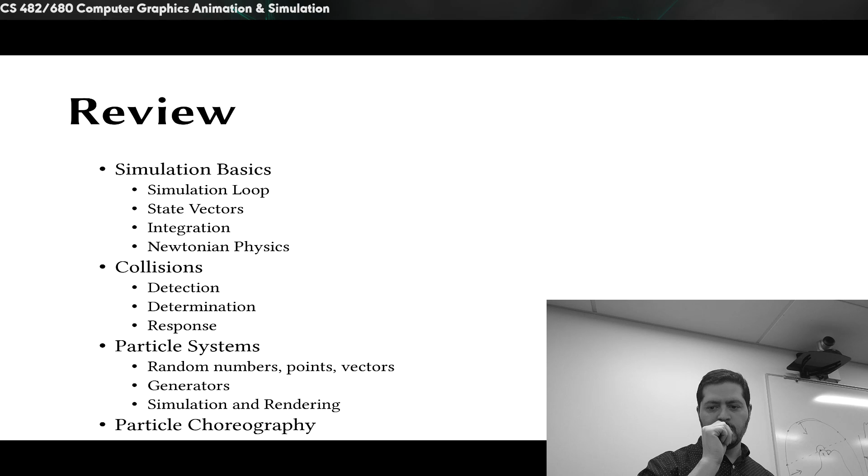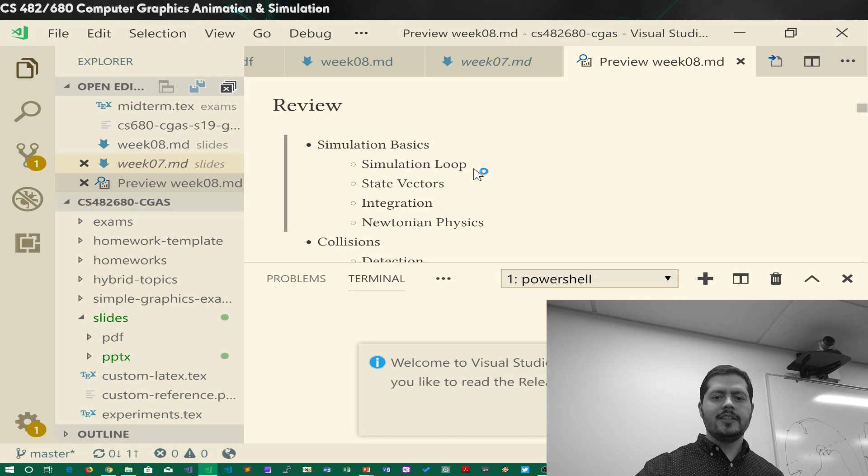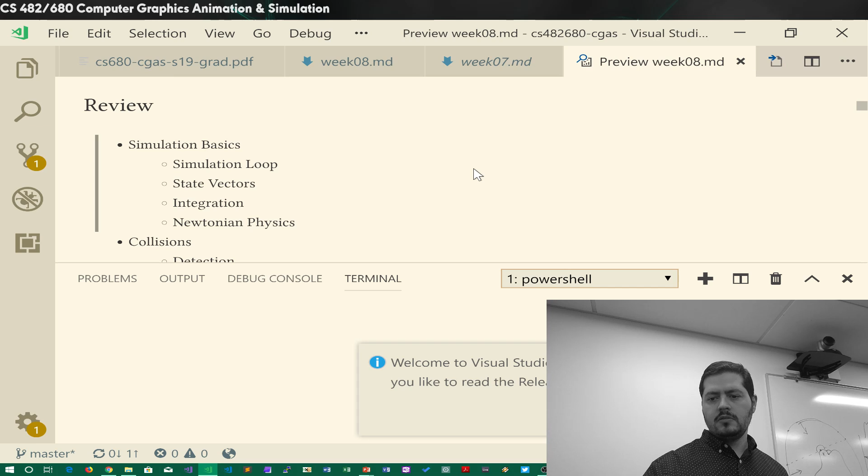Okay, so as a matter of review, I'm going to switch over to this one over here. So more or less, we started talking about some of the basics when it comes to simulation, like the simulation loop. We talked about collisions, where there's 3 steps: the detection part, then determination, where it happened, and response, what do you do once you know it happened.

Then we have particle systems. A lot of that's how do you go about generating random numbers? How do you generate where the particles are coming from, the particles themselves, the vectors, what direction are they heading off? The generators: you might have different kinds of generators, and they might have different shapes. A fireworks generator might look different than a water spout, or a stream of water.

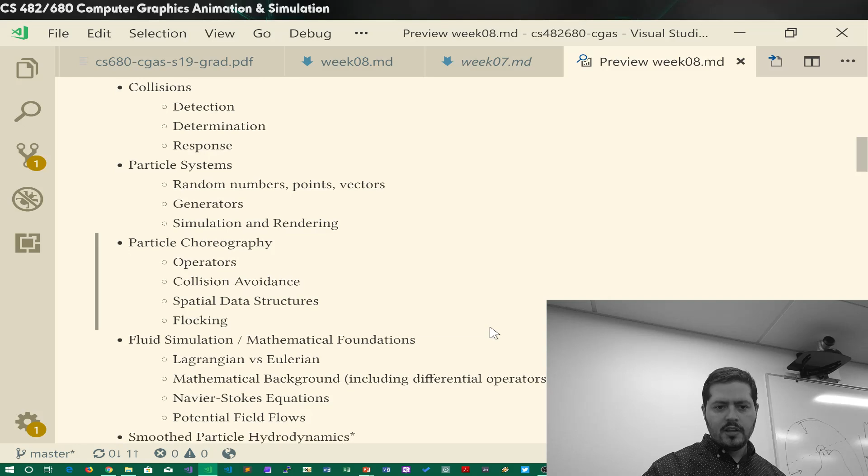And then how do you take these particle systems and go about rendering them? That goes along with Reeves' original paper, a technique for modeling a class of fuzzy objects. How do you go about representing that? So that's some of the basics of particle systems, and then we started going into choreography, how do you do stuff with them. Before, there's not a whole lot of physically based stuff going on here.

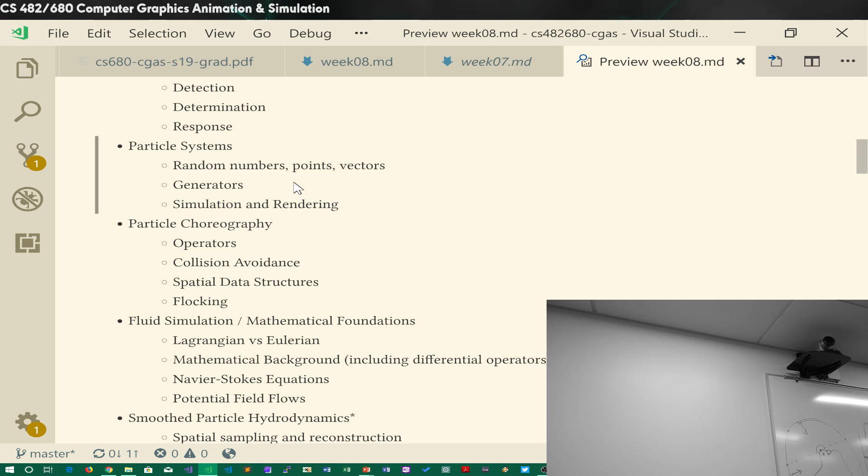There is some, but over here we're getting into operators, and you have acceleration operators like gravity. You could have some non-physically based operators as well, like velocity operators. Maybe you're trying to get particles up to a minimum velocity, or make sure they don't go too fast, so you might have a maximum velocity. Those are not technically physically based. Yes? Would a bounding box effectively be a position operator?

Yes. Okay. So a lot of times we might call that a boundary condition rather than an operator. A position operator would depend on whether you're just keeping the positions and they run up against the wall, or you're actually doing something with the velocity, like bouncing them off. And that might be part of the collision response, if you're handling that.

I don't know that the book is using the term position operator, but a lot of times it's more beneficial for you to think of it as a boundary condition. Especially as we're talking about fluids, because that term will help you understand the partial differential equations, where the boundary conditions help keep everything in control.

All right. So then we started talking a little bit about spatial data structures. Spatial data structures are useful when you have lots of particles and you need to get this under control, like with collision. If you're trying to have every particle interact with every other particle, it can quickly become something you cannot calculate, especially in an interactive application. So you may want to, like the galaxy simulation.

We're starting to move into fluids, and yes. I was just going to check, especially the spatial data structures, is there a specific lecture section, or is that mainly in the Hybrid Topics video? I don't know that we talked as deeply about spatial data structures in class. Maybe one of these papers is loosely talking about it. I think we talked more generally about it in class without too much detail.

How specifically will we need to understand it, like specific models, for the exam? I think it's how they're used in general. If you're going to talk about a spatial data structure, you should cite something, because I might ask a general question: how would you go about simulating a galaxy? You would need to talk about that. Maybe there's a specific technique, or I don't fully remember if one of these papers covers it specifically.

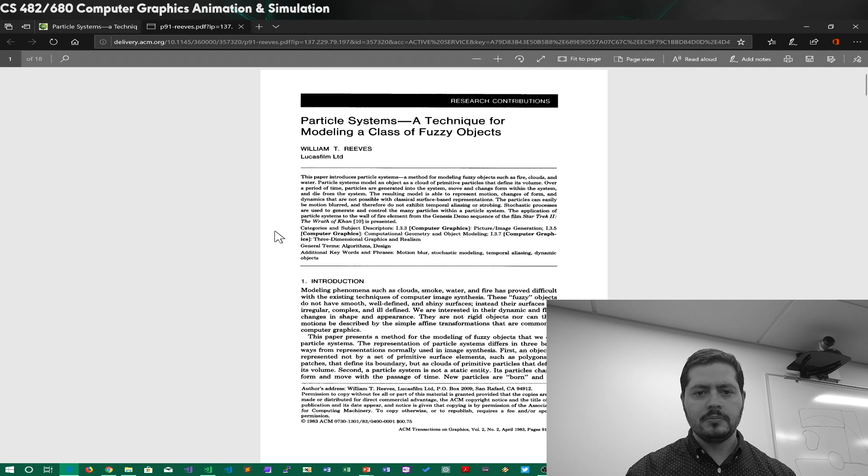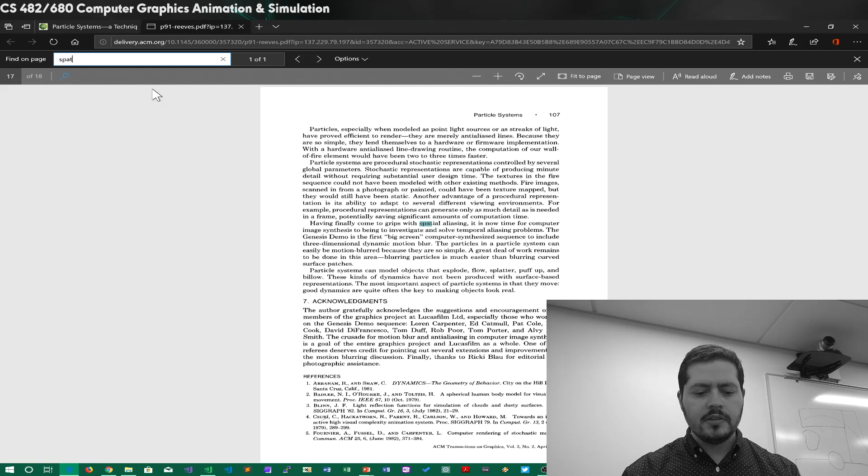Let's look at the 1983 one, because I feel like it would be more needed in 1983, given the computers out there. For all these papers, most of the time you can search for them on Google Scholar. If you have difficulty getting to one, email me and I'll post it on the Slack board. Okay. Spatial aliasing. So not really in that one. Karl Sims might have talked about it.

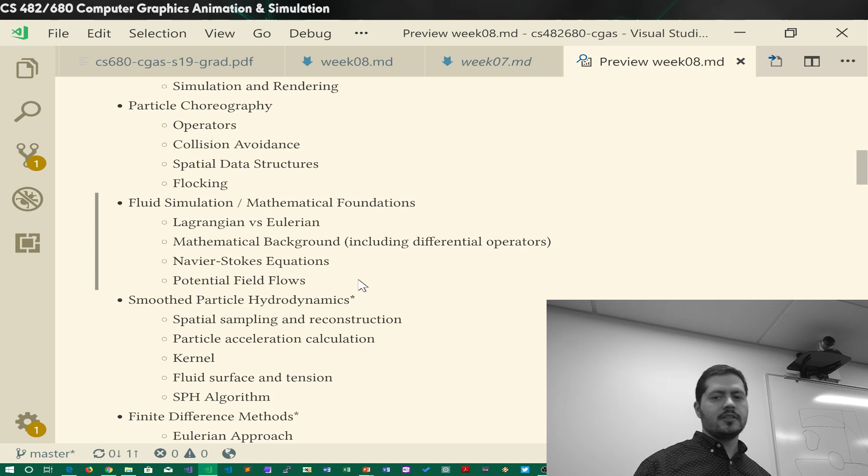And then we were talking about potential field flows. I think potential field flows is kind of cool because it's more or less about how are we trying to change it so that it's something we can handle.

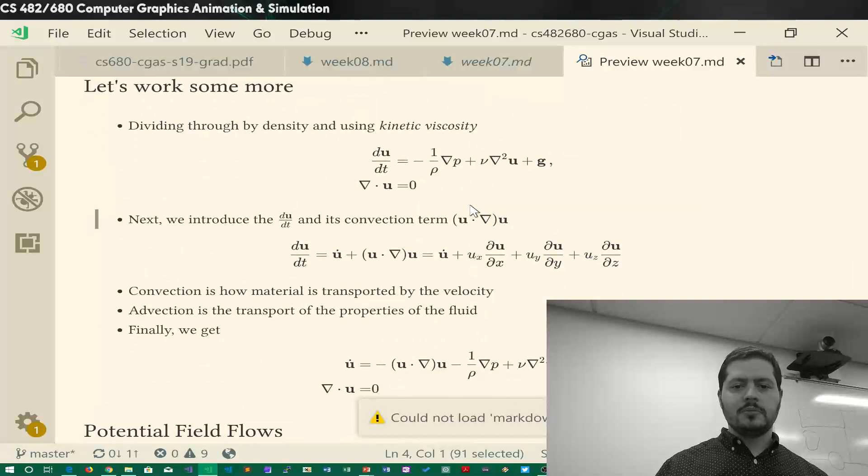So let me open up a preview of this one. Week 7 has a lot of good notes in it in terms of what I copied from the book. But here's what we can do with it - first let's put our Navier-Stokes equation on the board.

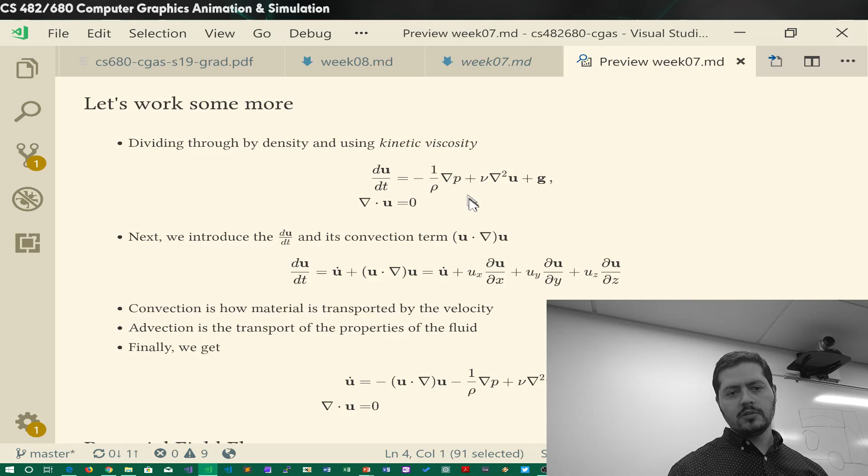Although I think it's kind of funny - does anybody know what Navier and Stokes did essentially? No? They took Euler's equation - if I go here, Navier-Stokes - they took Euler's equation and basically generalized it.

So you have Claude Louis Navier and George Gabriel Stokes, and the idea is they wanted to understand how viscosity affects fluids. If you don't think it's a hard problem, the Clay Mathematics Institute called this one of the 7 most important open problems of mathematics and has offered a $1 million prize for a solution or a counterexample.

If you guys saw the little meme in there: one does not simply solve the Navier-Stokes equation. It's like, oh yeah, that doesn't look so bad. It's like the rendering equation, but I tell you what, the rendering equation is a far easier thing to solve than the Navier-Stokes thing is. But that's fine because now we're jumping in on the really hard problems.

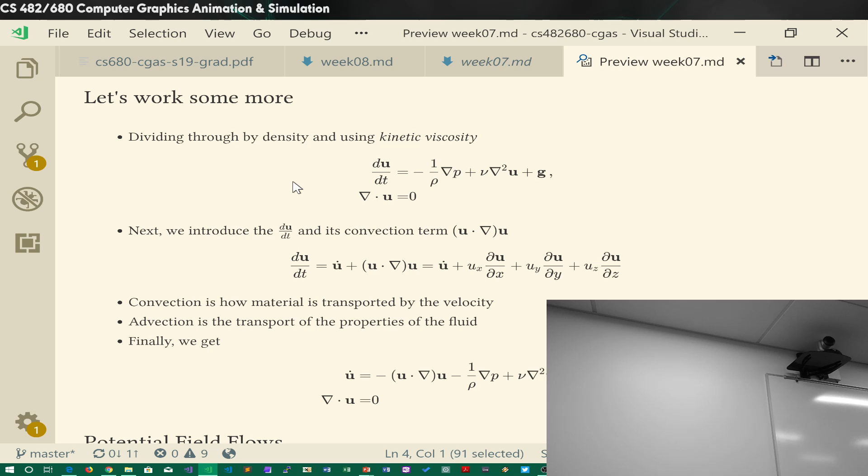I think that's it. So right there, this is the gradient of p - you have pressure over the density, so 1 over the density times the gradient with respect to pressure. If we go over here and look at this equation, let me move my mouse - we can see that this is basically Euler's equation. The only difference is this viscosity term.

And if we look down here towards the potential field flows, that if somehow we can get the gradient... where is it?

Irrotational, inviscid—if we can get rid of the viscosity term, then basically we're just left with the Euler equation. We're going to solve the Navier-Stokes equations, but essentially the part that Navier and Stokes really added to this equation is that they more or less generalized the whole thing.

Okay, and we were looking at turbulence, right? So inviscid—maybe we could find...

I guess turbulent water would be what happens with white water. If you think about it, when you add turbulence to your simulation, what do you think is going to happen?

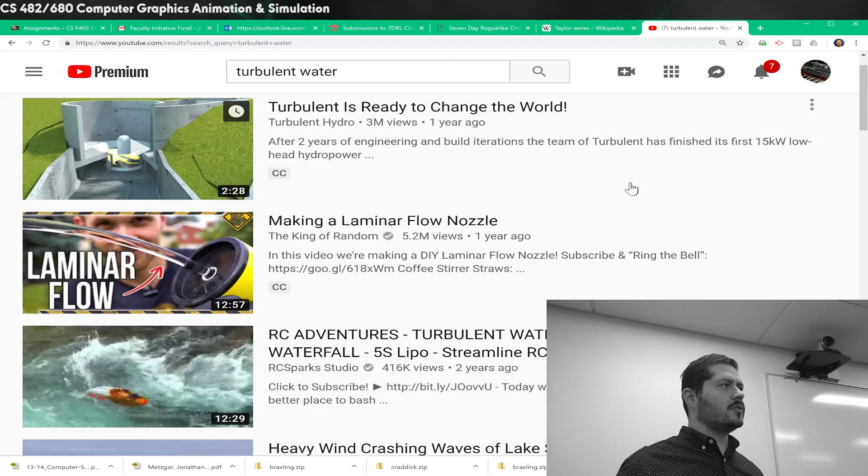Sounds like it's going to get messy fast. It's going to be messy fast, with all your swirls and fun little—I mean, it'll be interesting. Well, the funny thing is that the swirls don't necessarily need to involve turbulence.

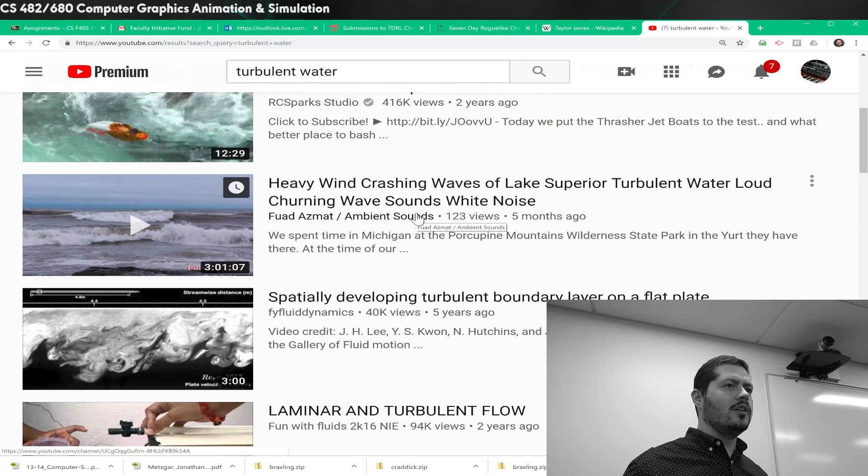Yeah, and that's another thing. If you have water crashing, if you look at the ocean and the water crashes and creates a bunch of foam, that changes the turbulence or the viscosity of the water, and it fundamentally changes the dynamics of the equation—not the equation itself, but the way it works.

Let's see here, I'm trying to find—what do you need to do to have cavitation? There's a certain phenomenon that happens with fluids, and I'm trying to remember what it's called. It's like a... I'm going to end up causing my computer to crash. It has to do with... my book's in my office, and I just forgot the term. There's an L word.

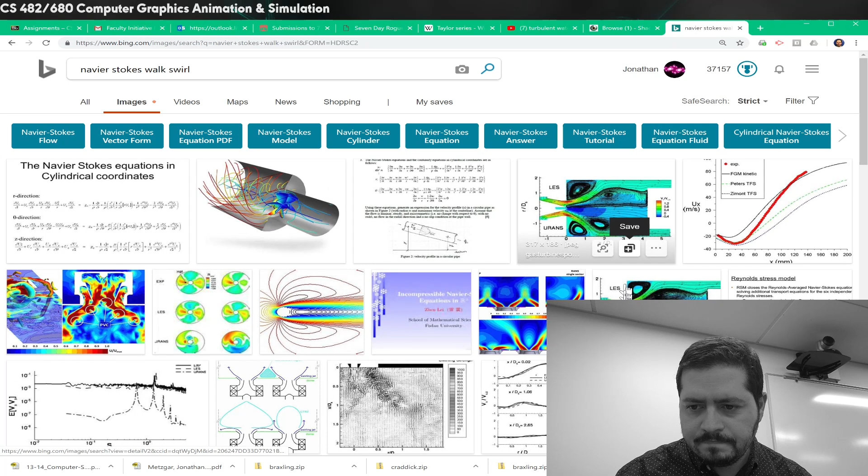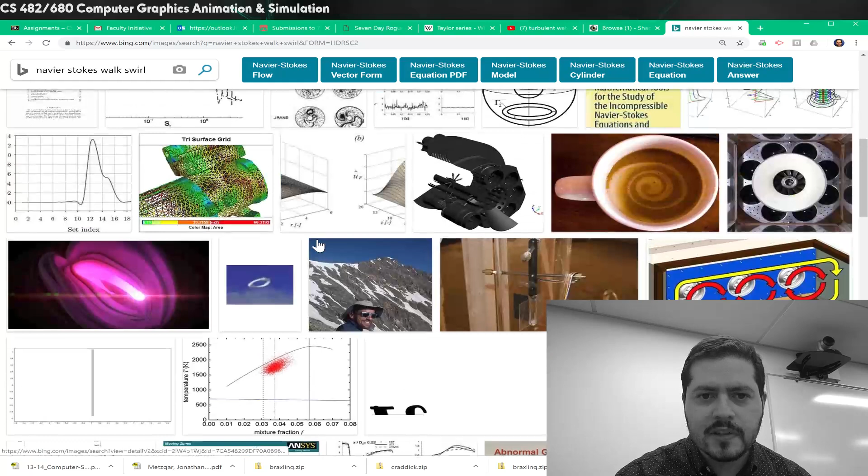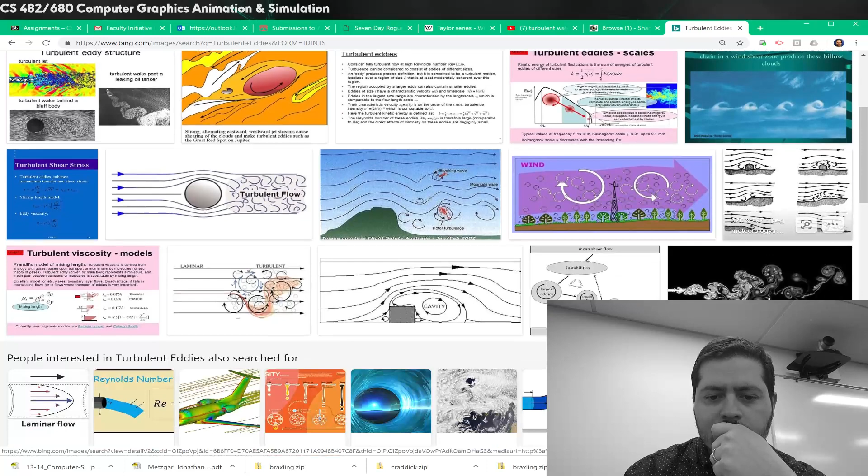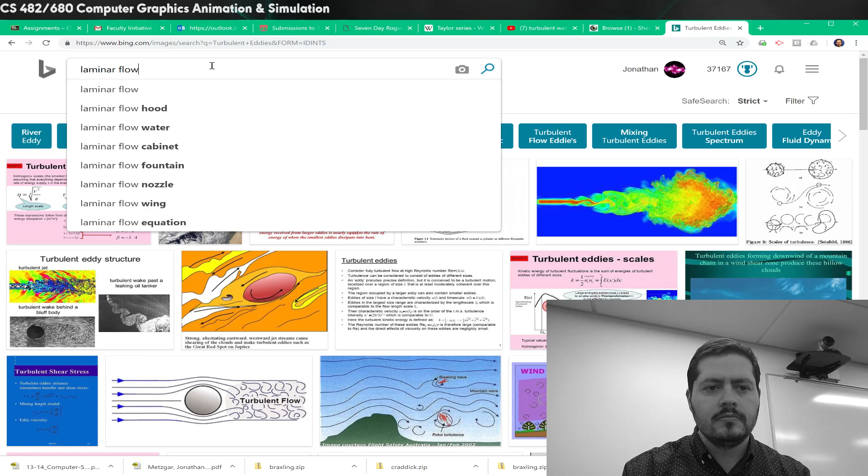That's right... Reynolds... Maybe I could type in laminar... Oh, I don't want the picture. I saw it. There's a specific name. Let's look at this one.

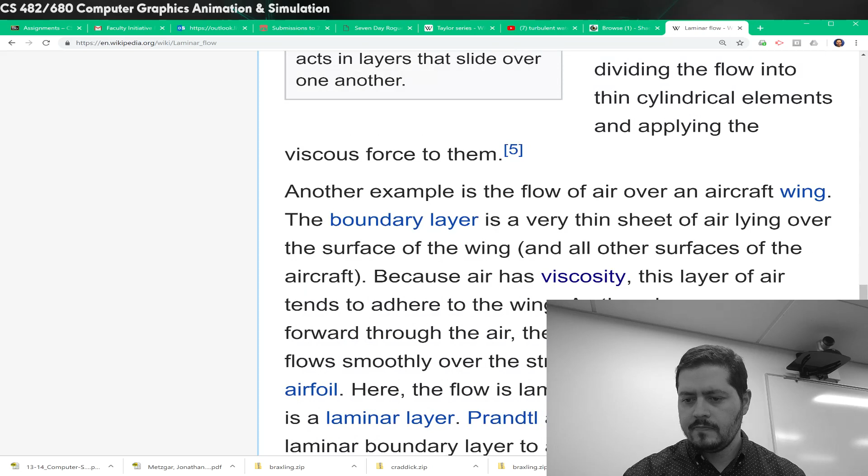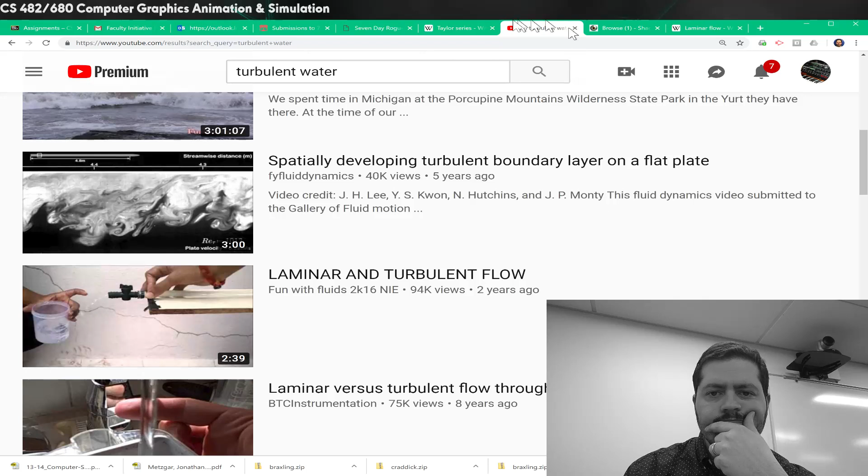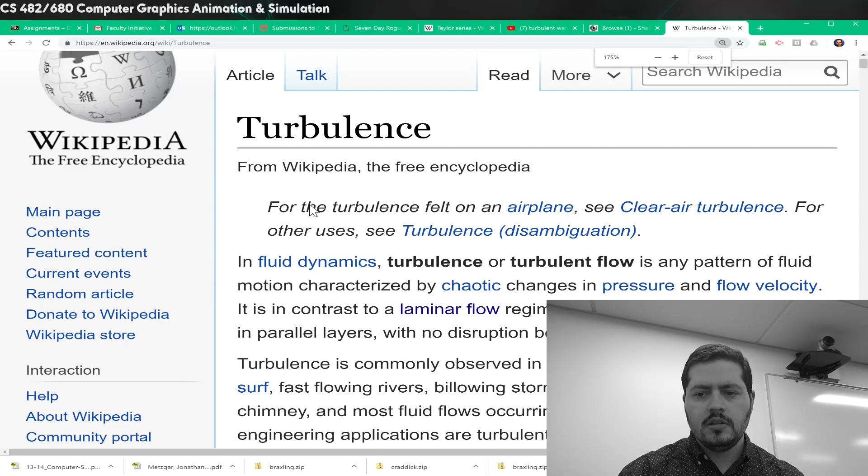So what's the phenomenon though? So there's a laminar flow, and then there's like vortices trailing behind it or something? Yeah, it has to do with—it's not something you need... so there's turbulence, but there is an effect. You have something called a Reynolds number, and more or less this tells you when it's going to transition.

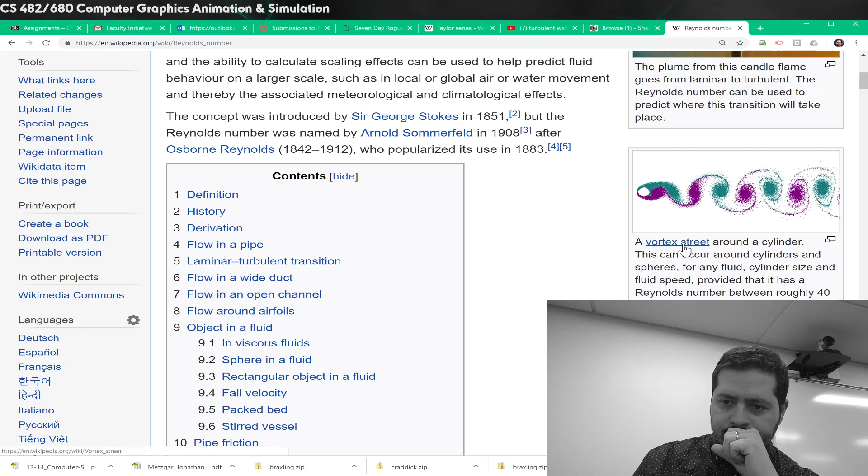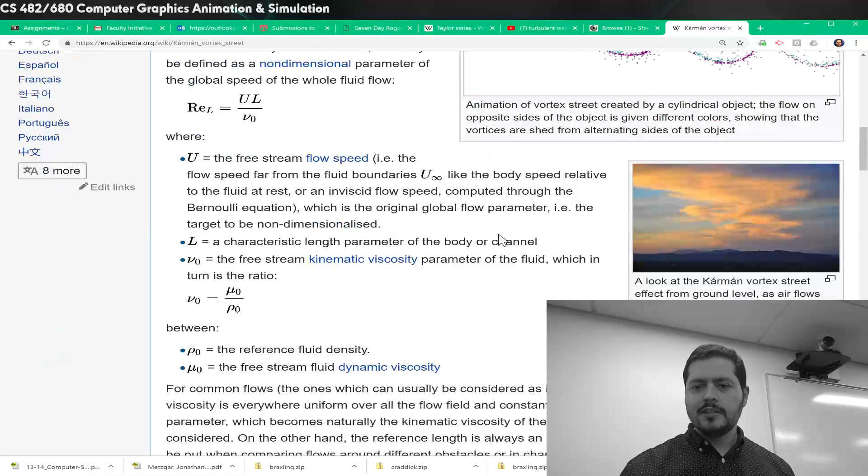There we go—a vortex street. I had it in my head as 'walk,' but it's a vortex street. And I was thinking to myself as I'm driving, now that I've been studying this, that's what's happening—you have this vortex street because of the pattern caused by your car driving over the surface of the road. You have that velocity change of the air on top, and the air on the bottom isn't doing anything, so you end up creating these cycles—the Kármán vortex street.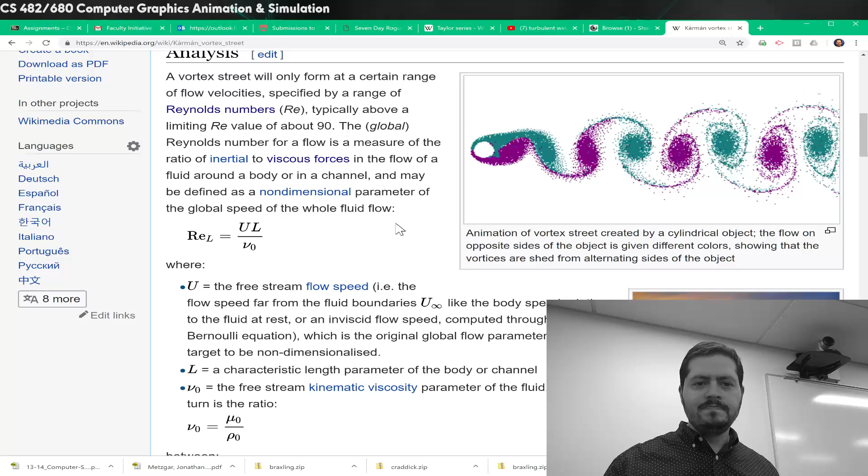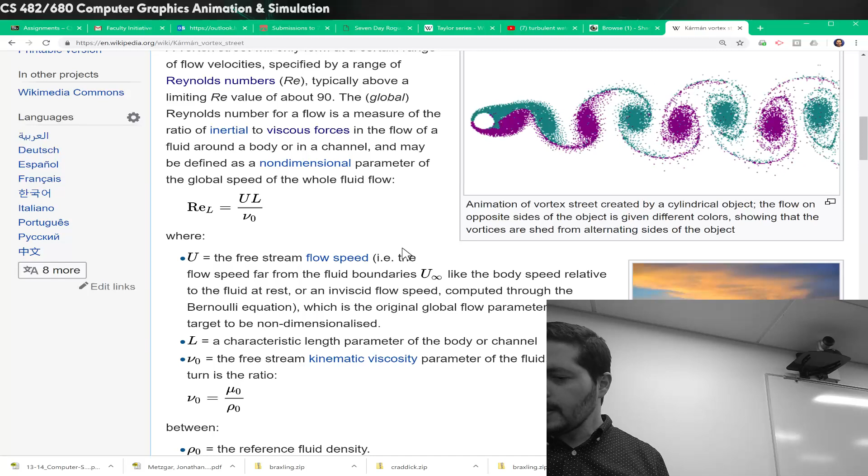Actually, yeah, I've totally seen that. It's been one of those things I've been like, why does it do that? Yeah, I've been educated, okay. Kármán Vortex Street—it's the same thing as when you put an oar in the water. Yeah, I think that's the same thing that's happening. So that's it.

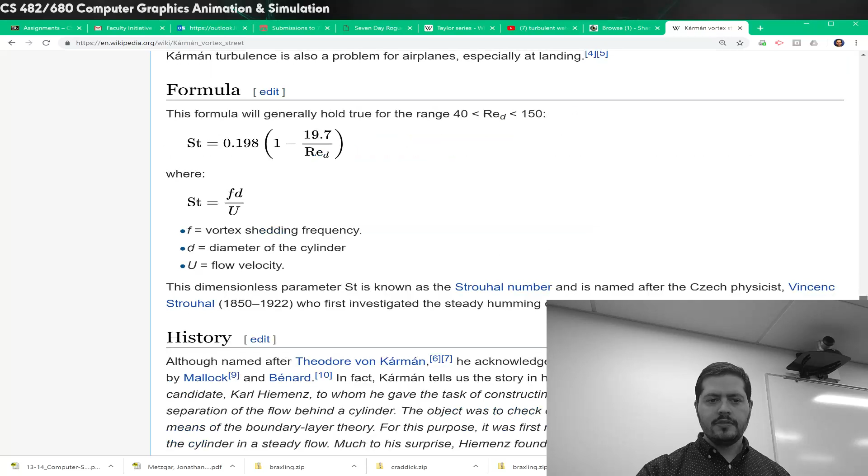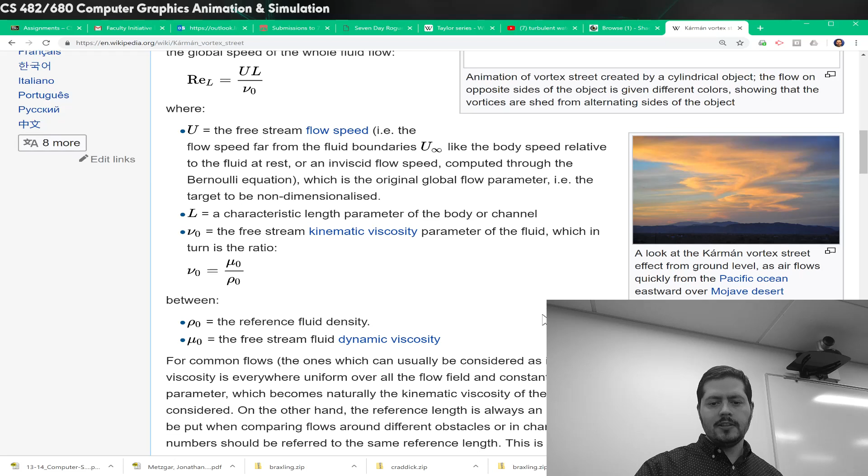Now, the thing is, if I'm correct, you don't necessarily have to have turbulence to create the vortex street. And that's the thing I thought was interesting—you can still have this effect show up without turbulence. I think it's because it turns out to be a constant. It's just what happens.

Anyways, so getting back to here—okay, so no turbulence, alright. Although I'm pretty sure you can still get those vortex streets without the turbulence. And let's see if there's...

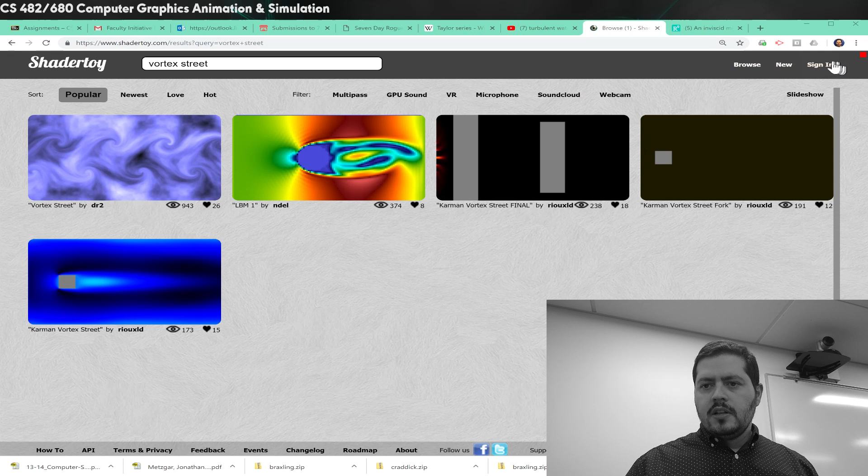Oops. Banging around here. So let me go to Chrome real quick. Close window. Sign in. I don't know if I forked one of these things off or not. I don't think I have yet. Oh, I gotta click on my name.

I'm starting to work on some stuff like the torch fire. I kind of recreated my torch fire inside of Shadertoy. I guess it's running a little slowly right now, but more or less it's just using that advection type where you just blur, more or less. It's like a little kernel that blurs. And then more or less you can get a torch fire out of it. So I'm working on some demos to help illustrate some of those fluid principles.

But yeah, so anyways, we got the Navier-Stokes equations up there, and we're like, how do we make this simple for us to actually work with them? And so one of them is, well, let's just make some assumptions, okay? So number one assumption is, let's make it steady. In other words, rather than have it vary in time, we just say it doesn't change in time. That doesn't mean it's not evolving over time. It just means that our velocity is not a function of time. So that's one way of making these things more simple.

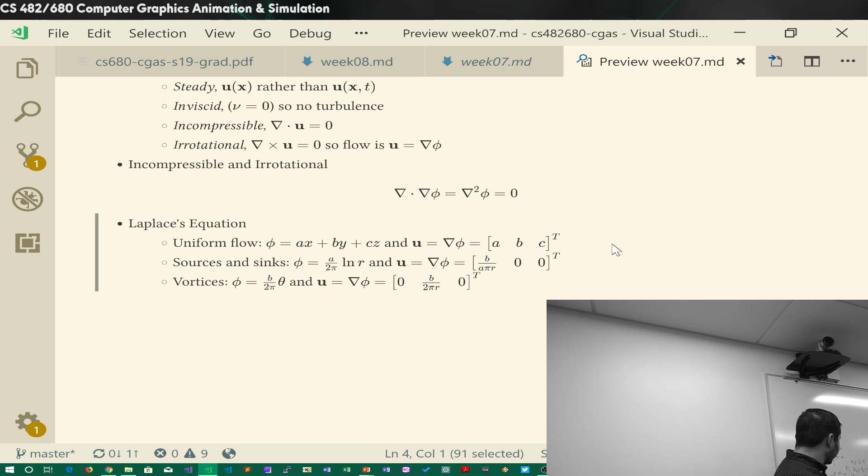And so what you can do with these is overlay them on top of each other and essentially simulate all these different kinds of effects. So as an artist, you might be putting together this animation and you say, okay, maybe it's an Eulerian simulation, over here I'm putting a uniform flow, over here a sink or a source, over here a vortex, and let's see how the whole thing evolves over time. So without needing to get into the whole turbulence aspect of it, you can basically simulate a lot of these effects. Easy?

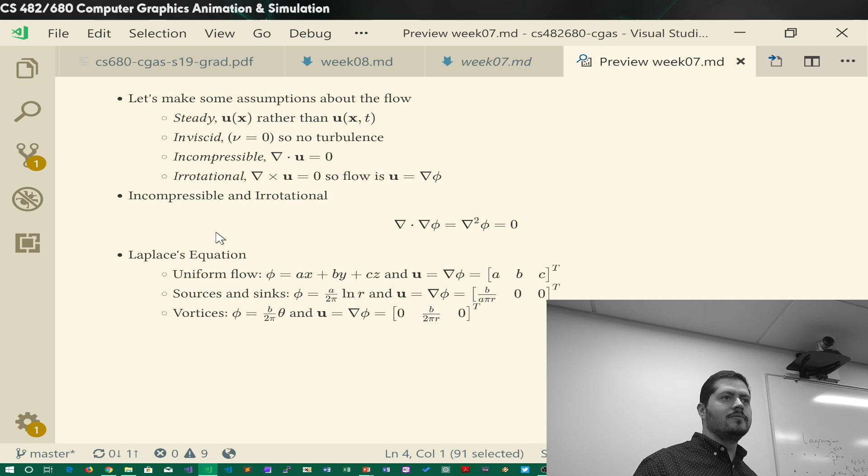Okay. I like to chuckle because it's not. Well, I can tell a computer to do all the work for me. Well, that's what we're trying to do, right? Now, I'm thinking that maybe I try to compress. I try to take an incompressible subject and turn it compressible.

So I do want us to be successful with this. So we're going to spend some time trying for everybody to be able to successfully make a fluid, okay? Because who doesn't want to simulate a fluid by the time they're done with this class? Kind of project I have, so I better do it. Okay, you want to. Okay, who doesn't want to? They're so opposed that they want to leave this class and never simulate a fluid.

Okay, so we have some different methods, right? We're kind of going over Lagrangian versus Eulerian. We spent maybe a little bit of time talking about Eulerian. Now we're going to talk about Lagrangian. We reviewed a little bit of the mathematical background, the Navier-Stokes equations to some degree. We basically decided that for a good deal of what we're trying to do, we're just trying to do an Eulerian simulation.

This is where it gets all. Maybe this is why Navier-Stokes is so popular, because then we don't have to say the Euler equations when we're talking about the Eulerian approach and so on. Okay. The other thing, we used his integration method at the beginning of class. Remember, where we time stepped it. So yeah, he's all over this class. His fingers are all over this class.

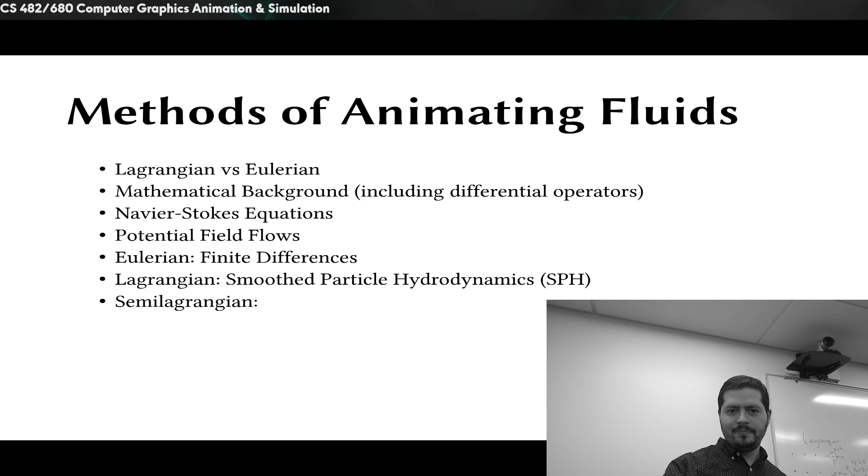Does anybody have any questions? How many people watched the SPH video? Yes. That guy's cool. Okay, so I thought, hey, what better way to learn than from the guy who practically invented the method to talk about it. Who knows one of the most defining aspects of it, or what popped out the most? Okay. So I would say the most defining aspect of the whole thing is that weighting kernel.

The weighting kernel. So how many people feel like they have a really good understanding of the Lagrangian approach? That's all we've done in the class is Lagrangian. The particle simulation that we have is all Lagrangian. So we've all worked with the Lagrangian. We have particles that are all independent. They can be wherever they want to be. It's all Lagrangian, because at this point we have not stuck anything inside of a grid to do anything with it. Our particles can do whatever they want to do. So smoothed particle hydrodynamics is a Lagrangian approach.

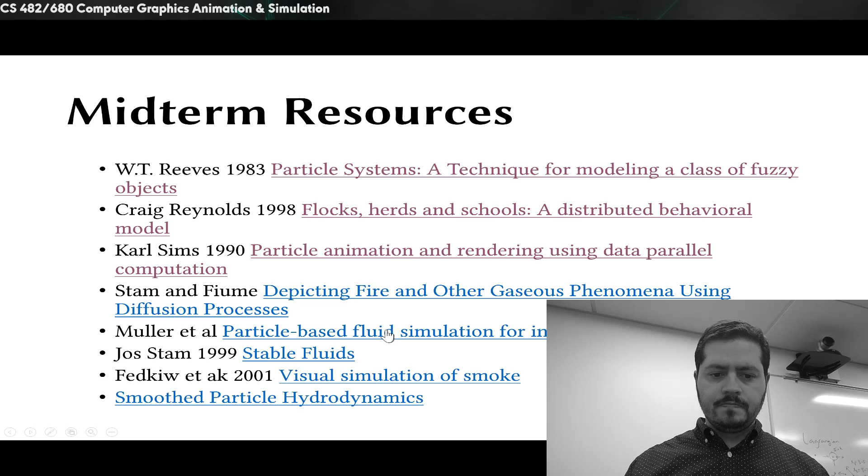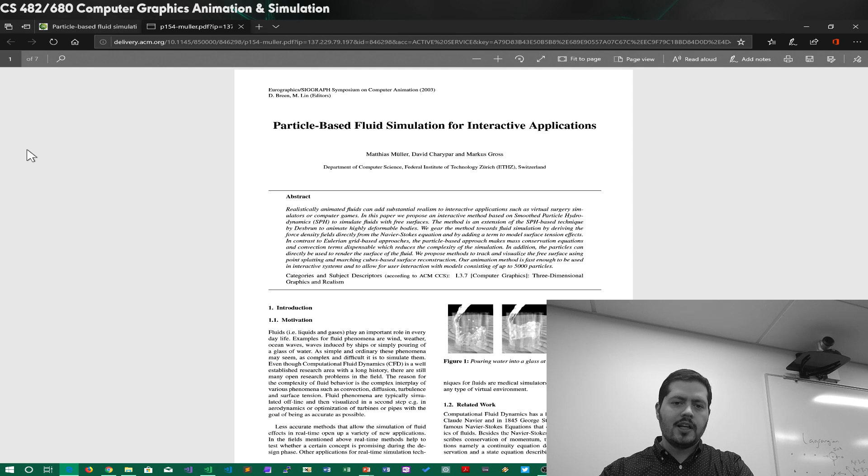Now, let me find an image. Maybe let me go to our Müller and others paper, where they really talk about SPH. Okay. And oops, this is probably a really good paper. Well, they're all good papers. I didn't pick bad papers.

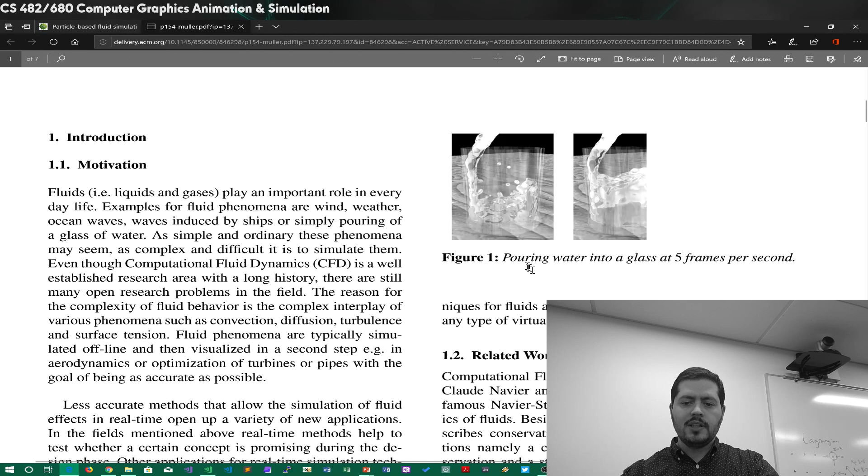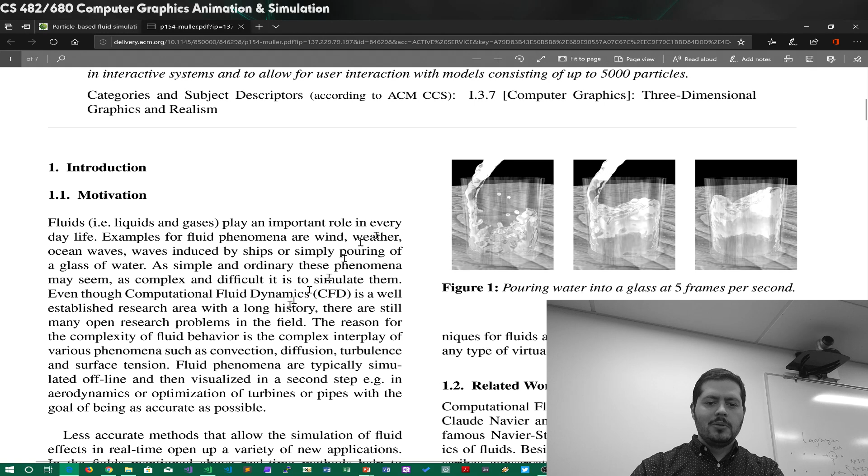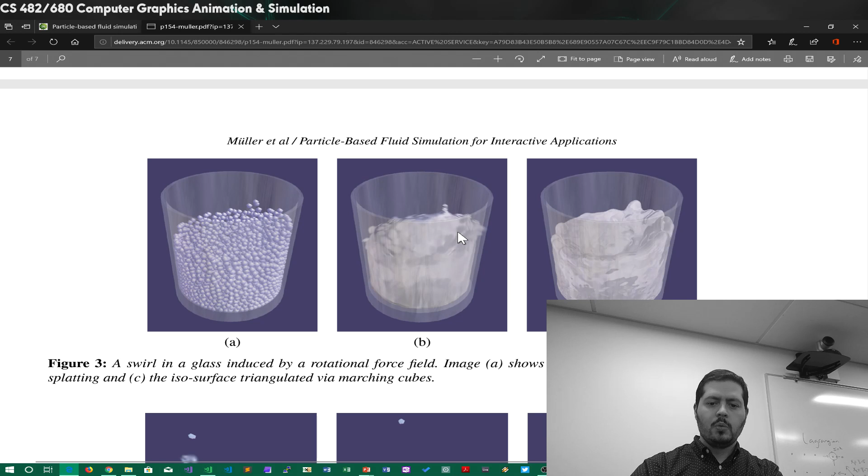So their thing was, hey, let's pour glass into a water. All right, let's pour water into a glass. That's a slightly different exercise. Okay, and so I want to find an image where this is Lagrangian. This is why it's a Lagrangian approach. So we're watching the fluid, but this is what's happening. Imagine a whole bunch of marbles inside of a glass, and the Lagrangian approach to this whole problem is, let's just simulate a bunch of particles.

Now, I hope that you're thinking back to collision detection, because you can see that this is going to be a fundamental component, right? You can't have particles passing through each other. Why can we not have particles passing through each other? Well, it makes the fluid compressible. They make it compressible, okay? Each one of those particles represents a constant amount of mass and a constant amount of volume, right?

We can't, so what is going to be the immediate issue with trying to do this approach? Like, there's going to be a lot of complexity in just having them all interact with each other. I mean, it's a collision problem. You're going to limit yourself. N squared, right. So you've got to think about that, okay? Now the collision part, if you were trying to solve this collision problem, what would you do?

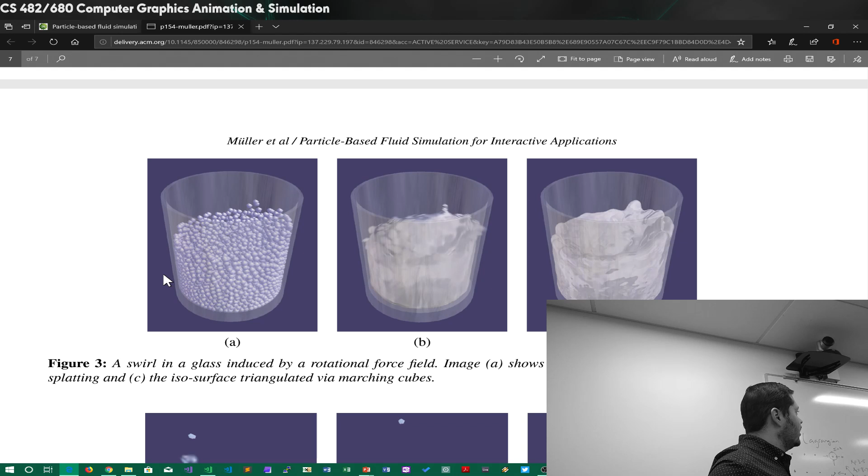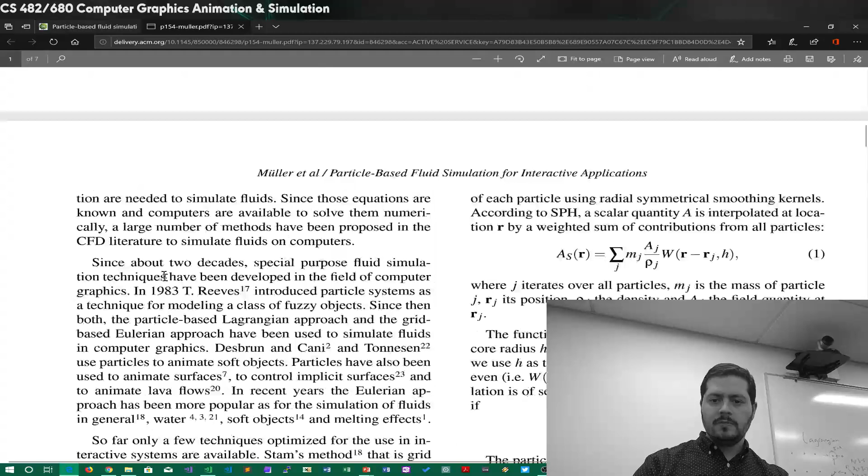I mean, we also need to model the Navier-Stokes equation from particle to particle, okay? The question is, well, which particles do you do that with? The ones that are touchable. Theoretically, you could do it with all of them, right? However, the key to this approach is that we use this weighting approach. Okay, in other words, the contribution, okay, so we have particle I and particle J, all right?

So let's look over here at this equation. So we have all the other particles. So we have the mass of those particles times the field quantity divided by the density of particle J times this function W. That's the smoothing kernel. And the whole point of the smoothing kernel is to say, what is the contribution of particle J with respect to particle I? Just like the collision detection problem, where we'd say, does particle I collide with particle J? Same idea here.

Now here's what we do, and this is why it's called smoothed particle. We use this function, it's a kernel, and we say that one particle will have an effect on another particle if it's within a certain distance of each other. And not just that it's within a certain distance of each other, but that the weight that that particle has on this other one is dependent on some other function. So if it's closer, we would expect it to have more influence, and as it moves away, we would expect it to have less and less influence. Okay? All right. So, the other one's too far away.

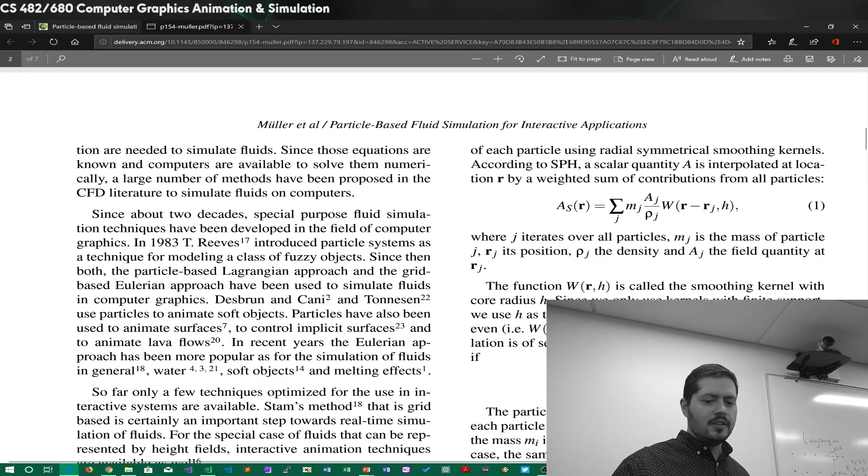Well, here's what we can do. Okay? We can say, essentially, we're going to use a whole bunch of particles. So we'll call that spatial sampling and reconstruction. In other words, we want to divide our volume into a bunch of particles. Later on, we want to reconstruct it so that we can say what the fluid looks like. But for now, the mass of particle I equals the density at that point x times the volume, right? Mass equals density times volume.

That's going to be important later. So then we want to estimate pressure by considering all the nearby particles. So if there's a lot of particles, there should be a lot of pressure. And if there's not so many particles, there shouldn't be a lot of pressure.

So we have this distance. So this is our weighting. This is our smoothing kernel, W. Sometimes you'll see capital W, sometimes you'll see lowercase w. It just amounts to a weight, essentially. And so we might want to say that the maximum support is, and we talked about the idea of a support function when we talked about collision detection, where it's almost like a signed distance function, where it kind of tells you how close you are.

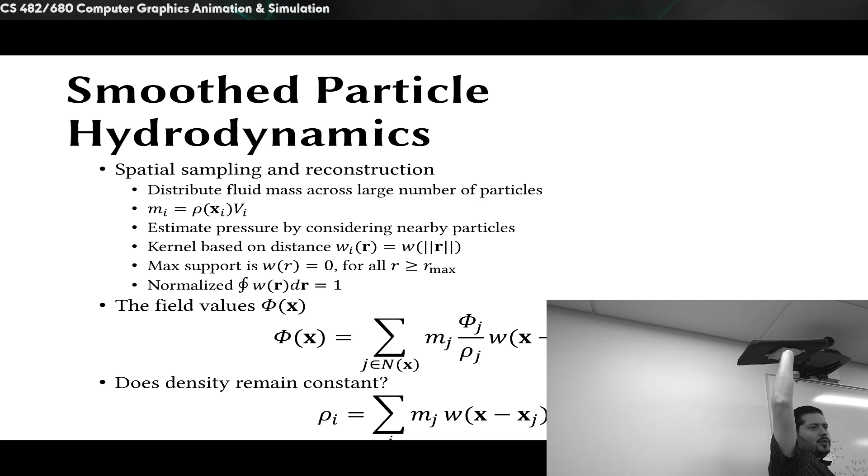So like a support as in, like I'm supporting this. Okay, a support function. In other words, how much does this particle rely on the support given by another one? So we might want to say that at a certain point, if we're a certain radius r max away, that it's 0.

This is just like the collision detection. We say let's only consider nearby particles. If we can bucket it somehow, then we can improve the efficiency. Same idea with the smoothing kernel. We want to say, let's take only some particles, and after a certain point, there's no more of them. Now, it is important that we normalize the kernel. So if we were to take the integral of basically the volume that represents, then it should equal 1.

Okay, so now we have field values, phi of x. This is how we're going to start calculating things like pressure and stuff. They're going to have this very similar nature to them. Notice how we have the mass and the rho, the density here. So this piece here more or less represents the volume. You see that relationship in there? So these equations have the concept of volume inside of them because we're dividing out by the density.

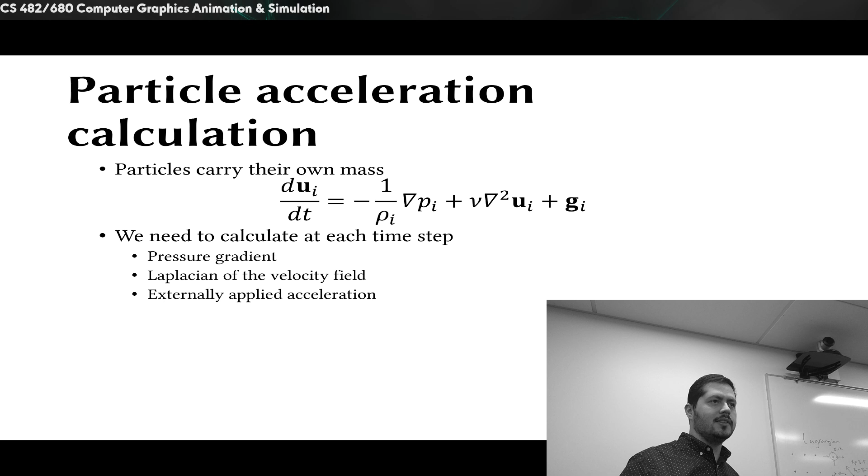In this case, because we're doing SPH, you'll notice that we're not just discarding the viscosity component. We saw that we could do some very complex behavior just by throwing that term out over here. But now we're moving on to a different way of solving the fluid equations, so we can keep the viscosity in there. So part one is the pressure gradient. I apologize because sometimes it's hard to control what the math is going to look like in the PowerPoint. Let me switch over here real quick.

This looks a little bit better. Okay, so in order for us to calculate the pressure gradient, I don't have any derivation for us here, I just kind of use the bottom line up front. This is more or less what we're trying to calculate, the pressure gradient.

The way we go about calculating it is we take all the nearby particles, and those get multiplied. So you take the mass times the pressure from particle I divided by the density there, plus the pressure of particle J divided by the density squared.

Times the gradient of the weighting function. And then the second term on the Navier-Stokes equation has to be the diffusion term. To approximate that, we take the velocity of particle J minus the velocity of particle I, divided by the density of particle I, and then multiply by the Laplacian of the weighting function.

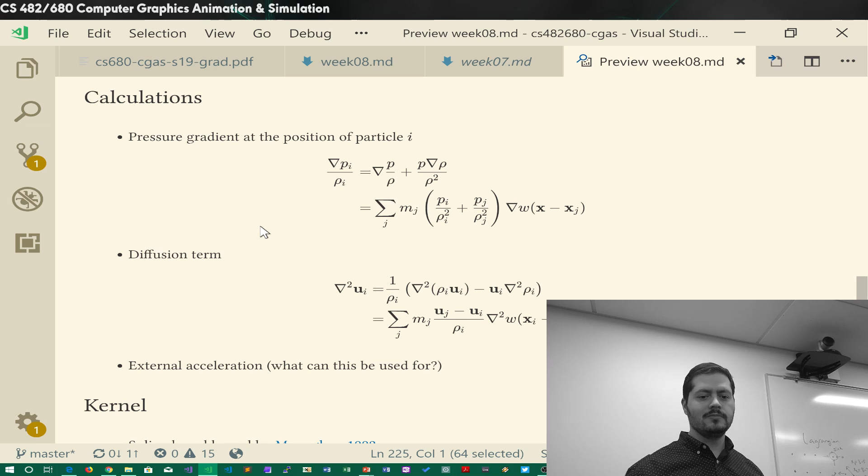Let's take a look at the kernel. I'm probably saying his name wrong, I'm going to say Monaghan. It's Monaghan, 1992, came up with a spline-based kernel. This guy really pushed, I mean his name is all over this particular method. So he created this spline-based curve.

And we have a way to calculate essentially the gradient and the Laplacian of this smoothing kernel. So the trick is, let's take the hard part of the problem, like these Laplacians and gradients and so on, and let's find a better way of doing it.

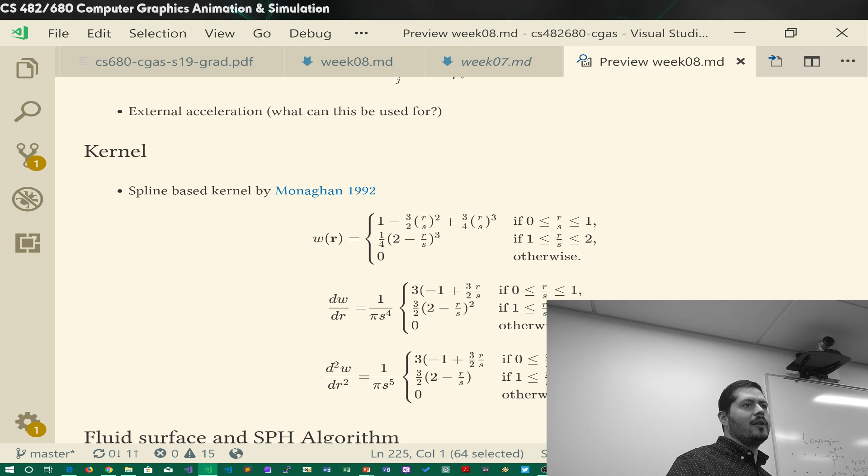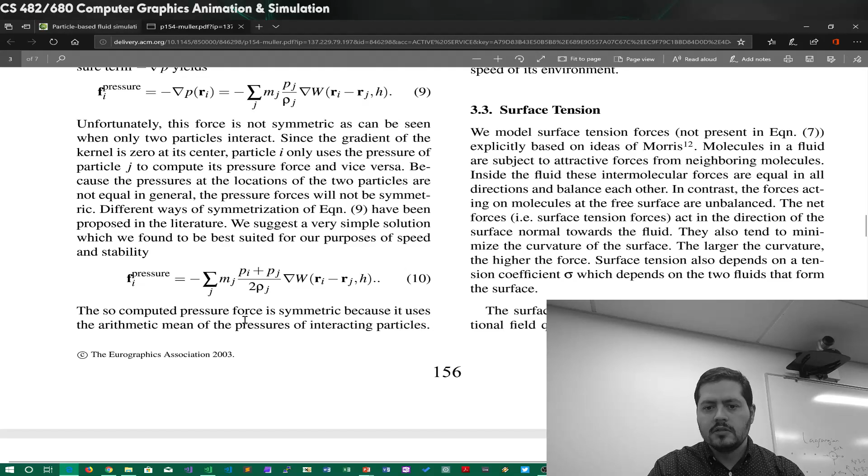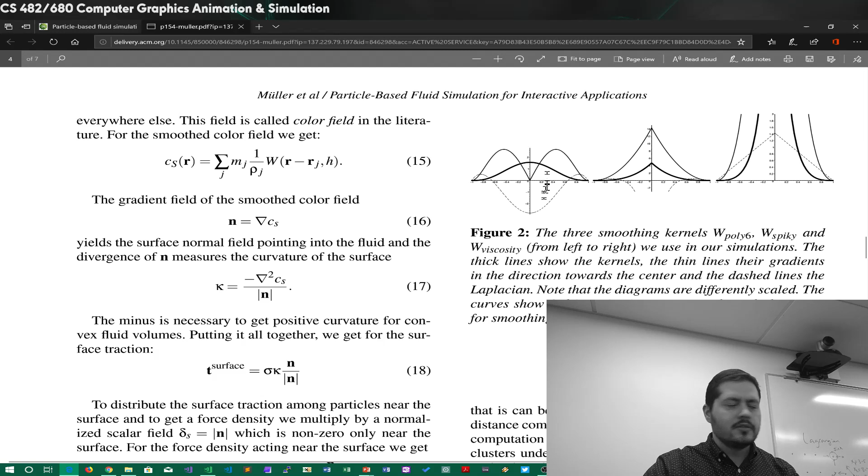If I'm correct, the paper here has graphs of, here's some smoothing kernels. The thick lines show the kernels. Let me make this bigger, fill up the screen. So this is a smoothing kernel. Notice how we almost make it look like a Gaussian, where over here it has zero effect. So if you're a certain distance away, no effect at all.

And then we can take the derivative of that. So the gradient looks like this, where it goes like that. And then the Laplacian is this. Those are the dashed lines for the Laplacian.

And that's how we use our... basically, that's some polynomials we can use for our fluid. Not bad, huh?

Just get lost in the math symbols. But once you just show, like, this is how they're calculated, I'm like, okay cool, got it. Lose whatever, there's a point where I regress to, okay, show me some code doing it. Show me how changing something in the code changes what's going on. Okay, cool, I get it.

And I totally understand, because even for me it can be hard to translate. Now I think I've spent enough time diving into the math that I have a feel for what these things do now, and it's like, oh okay. Especially if you can take things like the collision detection and kind of think, oh, it's just acting like that. And when you see what's happening, it makes a difference.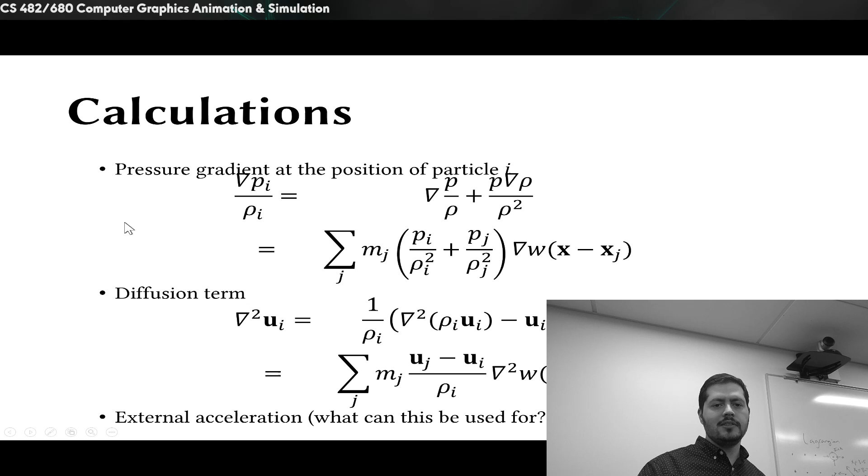Okay, so I did want to talk. So there's the smoothing kernel again, but I did want to talk a little bit about...

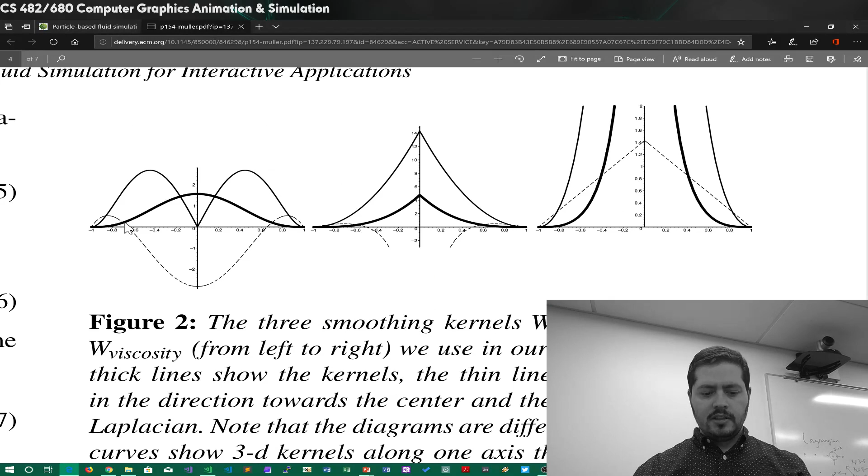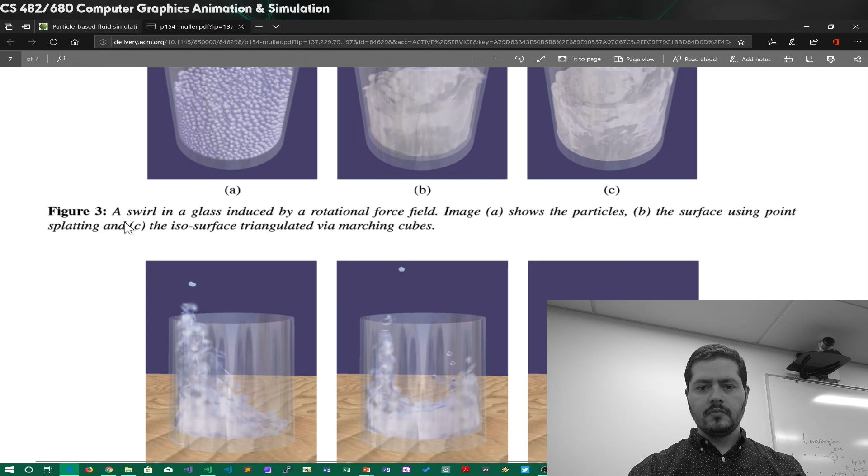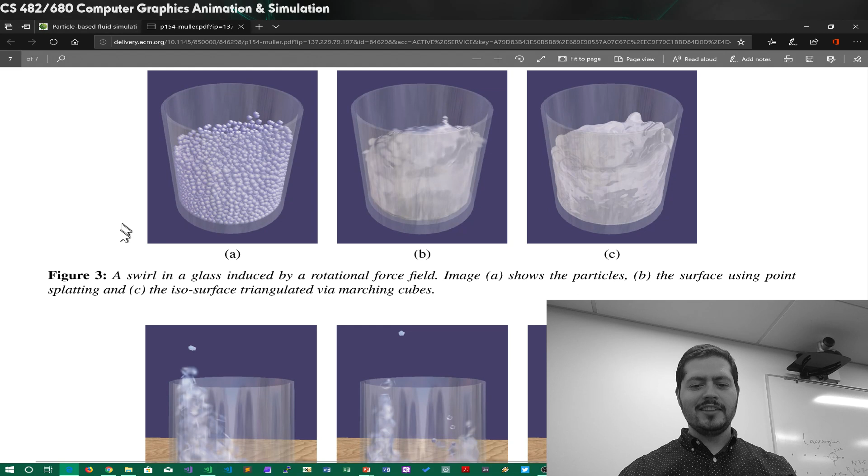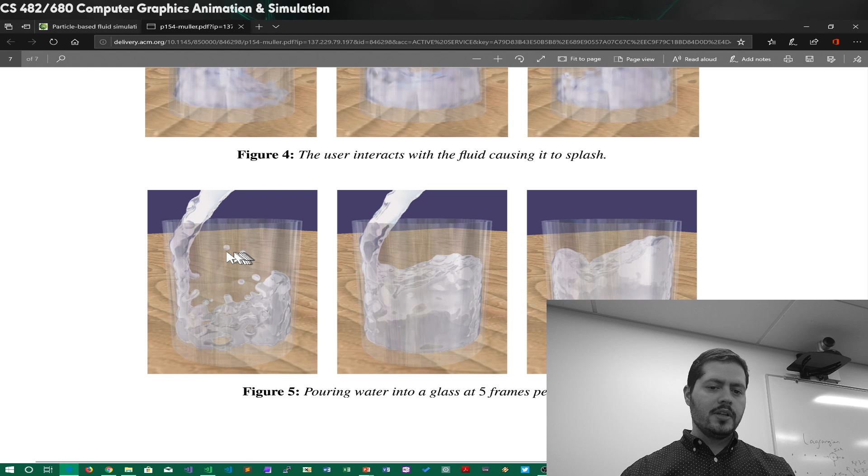We'll talk real quick about how you make the surface, since we already mentioned this in the paper. This is what it looks like. So we have a bunch of particles, and now how do you make it look like a fluid? That's our next challenge. There are a few different ways of causing it to act that way, and depending on how you do it, you can get these splash particles. So you could use a variety of techniques.

You might want to use marching cubes, or you could use blobs. You could use ray tracing. One thing SPH has is this springiness to it, so that could be unnatural depending on what you're doing. SPH is really good for splashes and stuff, but it does have this springiness aspect to it.

But you'll notice that we have this scalar color field, and I almost think maybe they're actually talking more like a signed distance function-ish. But here's another application: what happens when you take a scalar field and take the gradient, you get a vector field out of it. So the idea is you might want to use thresholding on it to determine what the fluid surface is, so you can kind of limit what's happening.

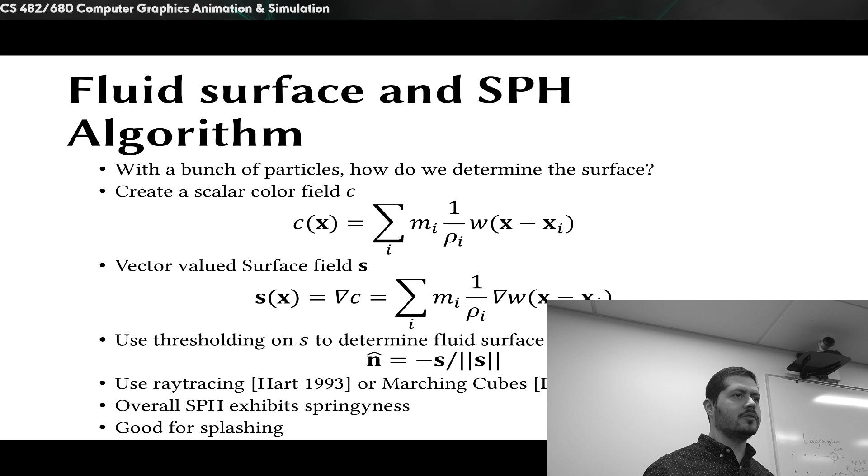So there's an aspect that once you have the particles, then you have to kind of make it look like the surface of a fluid. So that's another step on top of it.

We kind of talked a little bit about finite difference methods already, although I wasn't explicit about it. Does anybody know what finite differences are? We talked about them in class already—remember we were talking about how you update velocity, and we said you could do the backward difference, the forward difference, or central difference, like the central difference theorem. Remember the velocity was changing at different rates, so some of it would fall faster, some would fall slower.

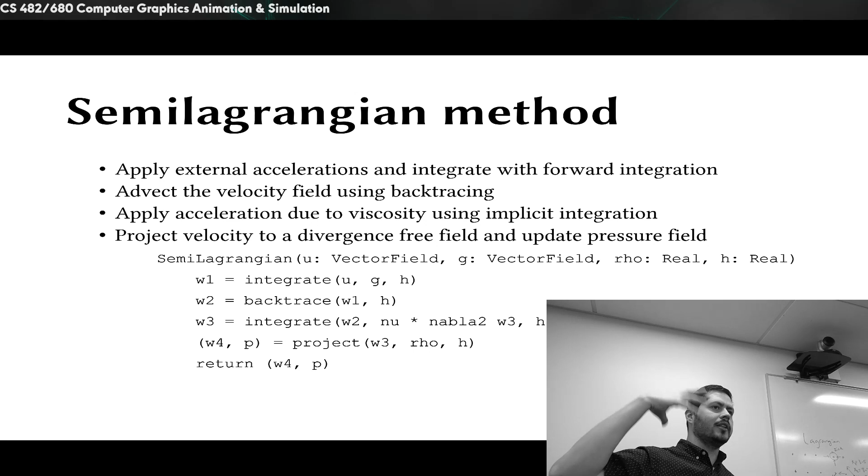In other words, we pass in the vector field, the external accelerations, the density, and our time step. We do our integration, we backtrace, we integrate again, and then we project, and we return the velocity field and the pressure field. We basically use that to evolve the system over time. So it's something we have to be aware of.

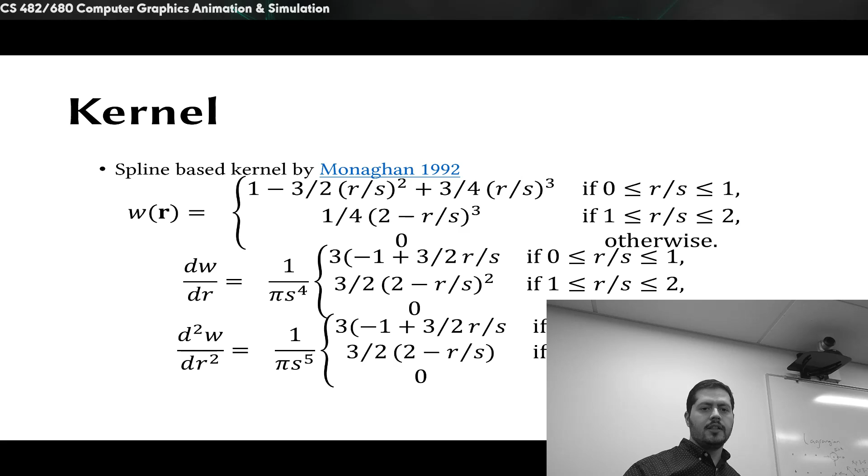Okay, so we're just mentioning it briefly, but I think that's all I have for today. Hopefully we learned a little bit more about how you actually get fluids to work. I think we're close with our own simulation stuff—it's just a matter of whether we can apply these extra functions to it. So I think that's it.

Okay, so midterm—where, when, how? Oh yeah, so you missed the beginning. Sorry, no, let me real quick stop my OBS thing.